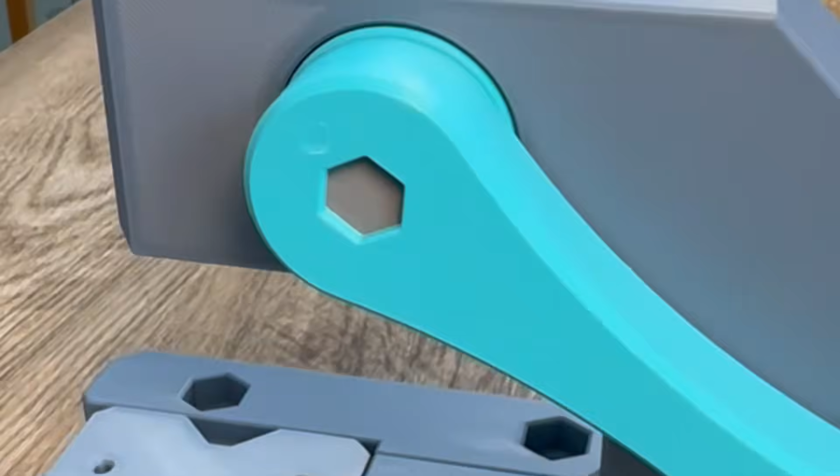We're back with another 3D printed press. This is an upgrade of our previous press based on some feedback we got from people. In this video, we're going to go through the design of it, how to set up your build plate, and then how to put it together. Let's look at the design of this thing.

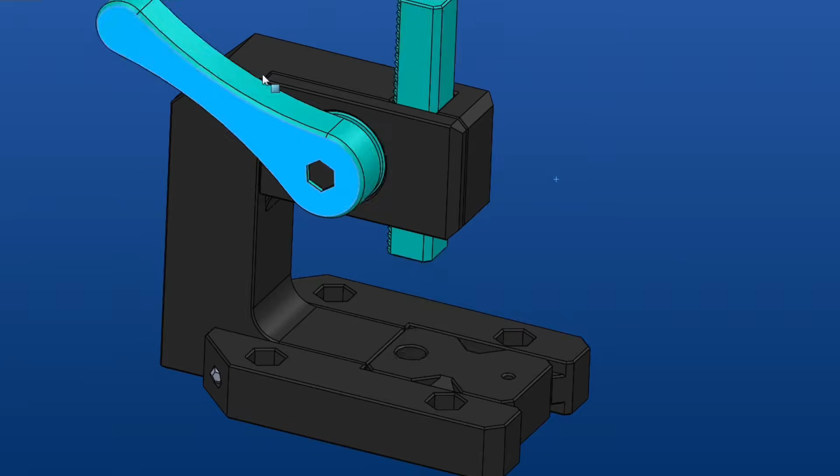We've got a base with an arm. So you rotate the arm, the ram goes up and down, and we're using this to push things in or out of holes most of the time. Inside of here, there's a gear, and the back of this ram is a rack gear. So as we turn, this is how we generate motion. So this guy is basically the wrench to give you a bunch of mechanical advantage so that you could push really hard. The older version was lacking this kind of outrigger, so it was a bit tippy.

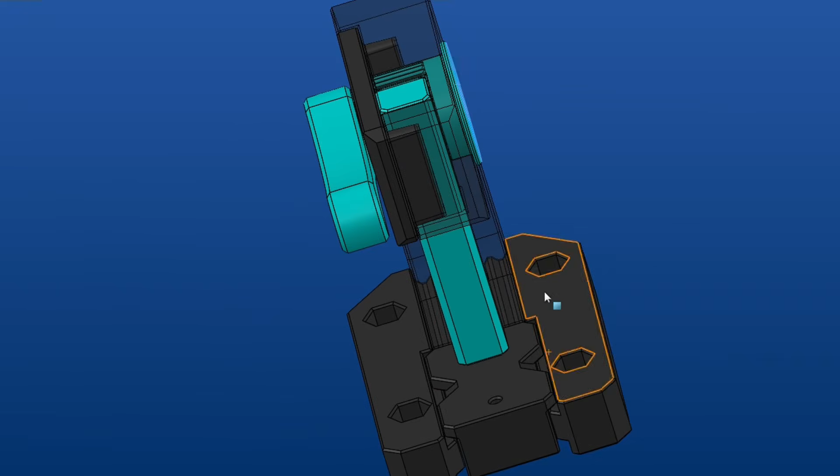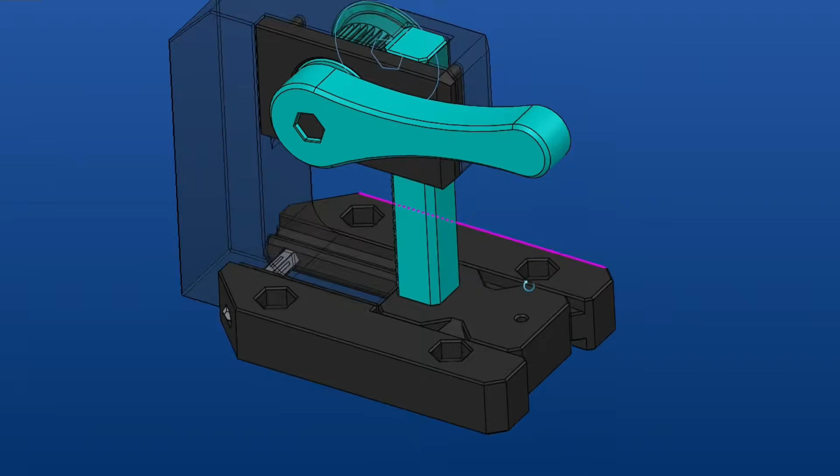We did a better job about it tipping to the left, but the arm had to be on the left side of the thing, well, facing it. And we've extended this out front more because it was prone to tipping in that direction. And now with the longer legs on it, if you're pushing directly over the end, hopefully it won't want to tip over on you. We've also added these counterbores and through holes in case anybody wants to bolt it to a bench. That was a request on the last version.

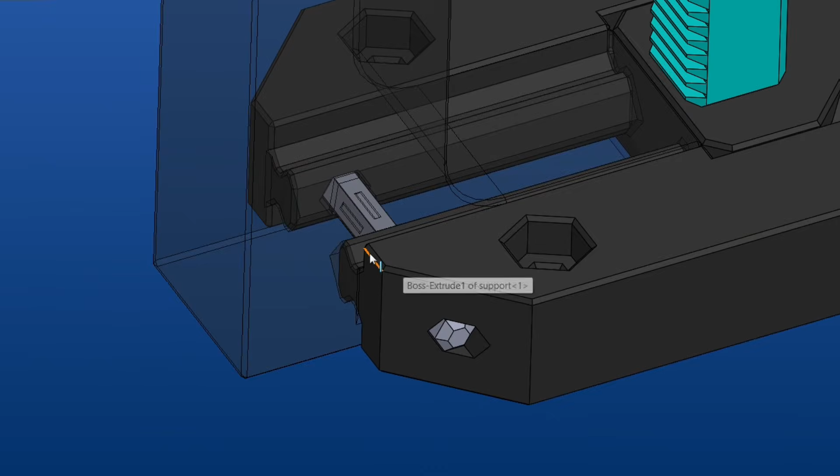So we've added these here, and then the two sides actually attach to the main body via these slide features. They're not quite a dovetail, but they're similar. So they slide right in the front, and then they fit fairly snug. I'm not really sure this crosspin is required, but it's there anyway just to make sure that they stay where you put them. There's a few interference ribs on the inside of this main body to hold the pin in place, and it should be pretty close to flush on both sides.

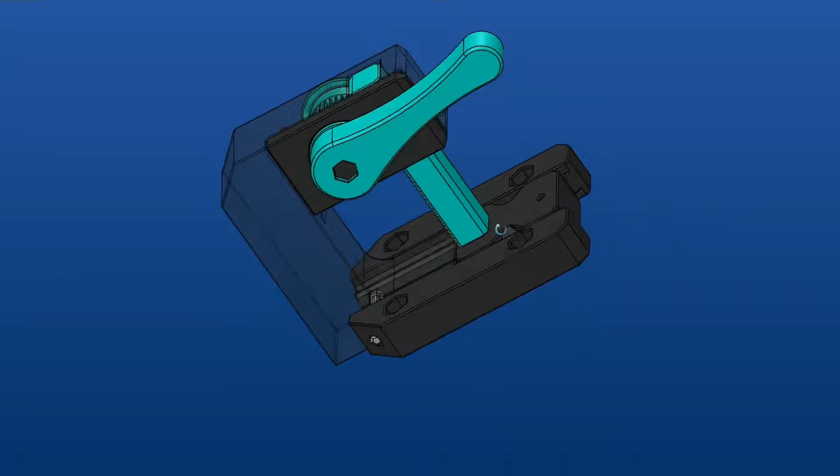It's a little tough to push through, but it's meant to be permanent installation. I don't anticipate anybody taking this apart a lot. So really this was a one-time install to kind of make everything permanent. We had a hole in the last version so that you could push pins out, but you couldn't really get the pin out of the hole after that. So we did have some requests to provide a way to get the parts out.

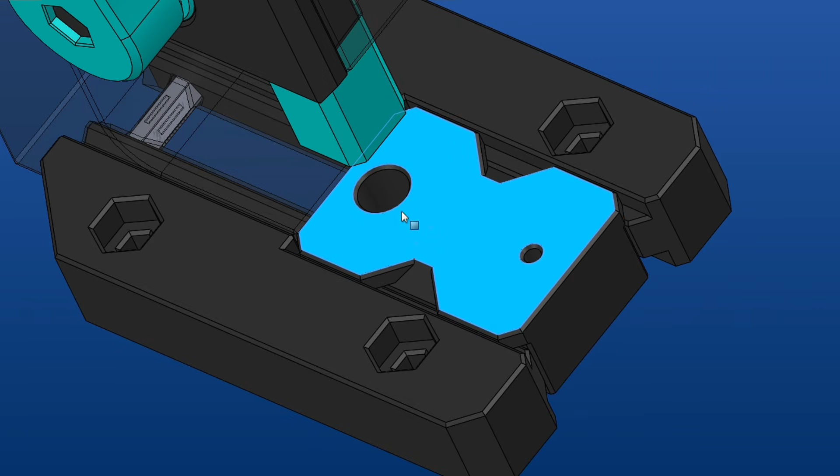So this block is removable. It just slides in. It's staying there under its own weight, and that's it. So when you push things through, you can pull it out of the way. You can also back it up and leave a separation here so that you could fit an even larger thing through. And you've got the two different size holes depending on your application.

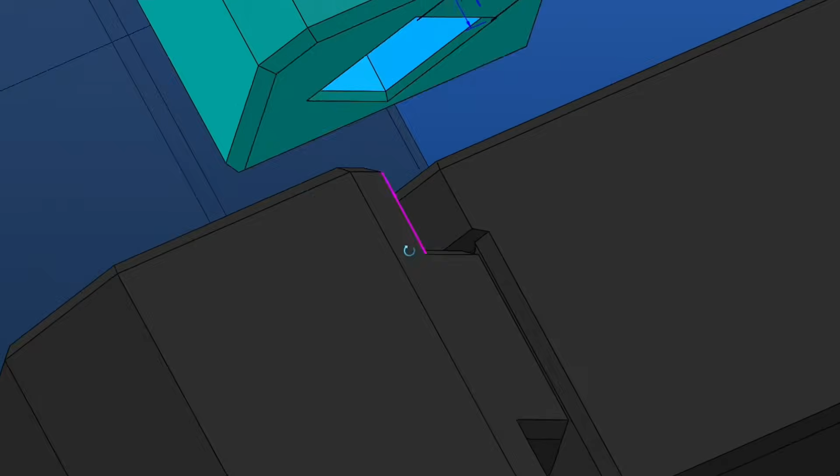The RAM's got a tapered socket in one end. It's 2.5 degrees on the side. It's 15 millimeters deep, and it's 10 millimeters square on the front face. The chamfers are added after that. So somebody did request that we add this feature for adding accessories to the end of the RAM. And we also still have the other end, which is solid. So you can just flip it over if you have no use for the accessory. And maybe I'll add the RAM with no accessory socket too, in case someone wants two empty ends.

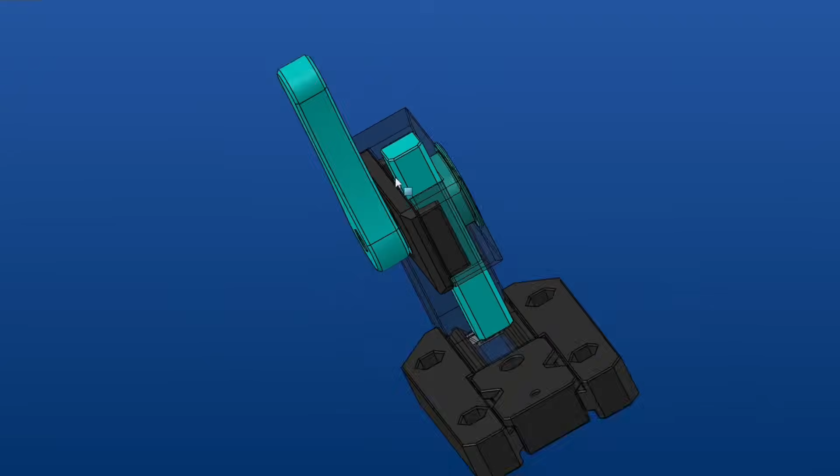This plate, really, its only purpose is to form this side of the cutout for the RAM. We couldn't print that with no support, so we've got this guy with interference ribs. It pushes down nice and snug, stays in there, and nothing's really pushing against it. The forces don't really provide any side load most of the time. So this stays in place, really does its job nicely.

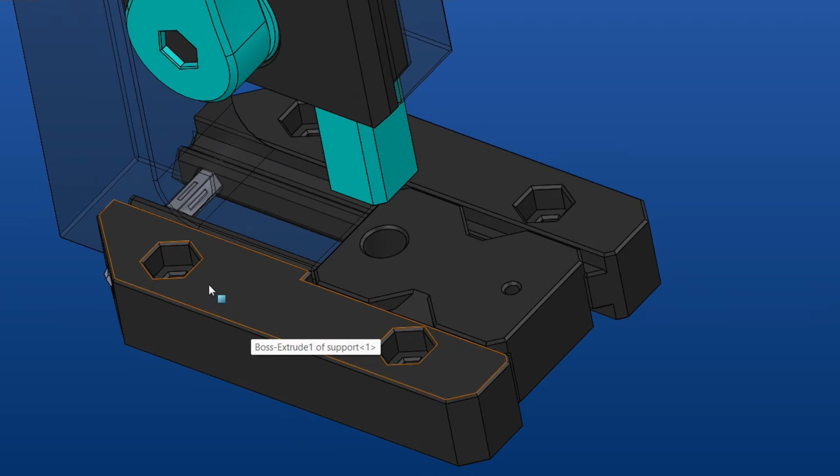This piece is reversible. It's the same part on both sides, so the counterbore also exists on the bottom, which shouldn't cause any problems for anybody. These cutouts were just finger picks so that you've got something to grab onto. I seem to use the big hole now that it actually exists, but those really seemed cool when I was drawing this.

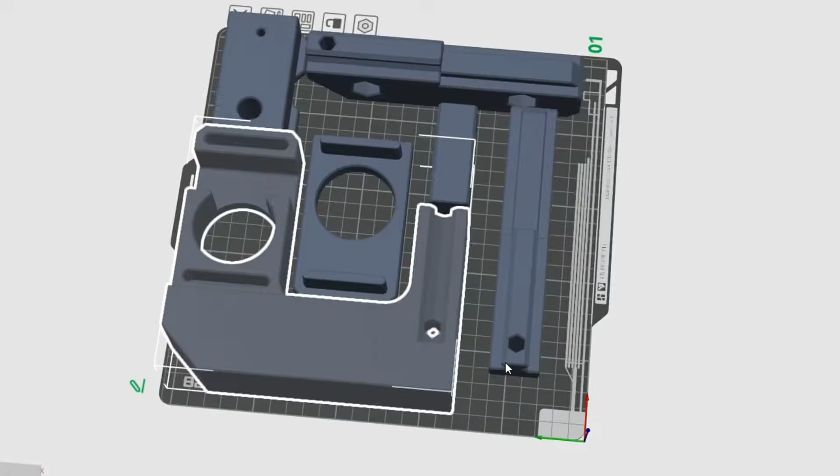This is the print bed setup. We want our parts in these orientations. So the main base is going to be on its left side. We want the sockets facing up, the hole facing up. These dovetail features will print on their side, so that'll give us a nice part with no supports. The cover plate, the side plate, is posts up.

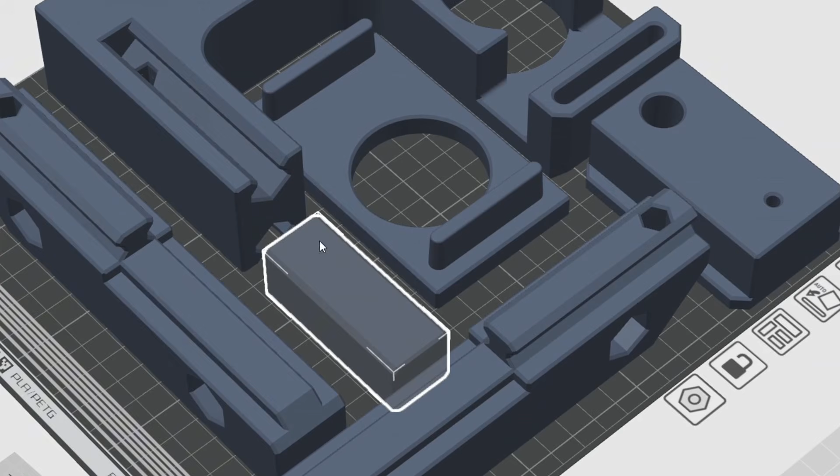We want this square post on its side for strength. Probably print it on its end without too much problem, but it would be a weaker part. We'll maximize strength by making sure that the print lines go in this direction. The supports, we want to print on their side so that the rib is up, and that'll allow us to print all of these hexagonal shapes without support, and we can print this whole rib feature without support too.

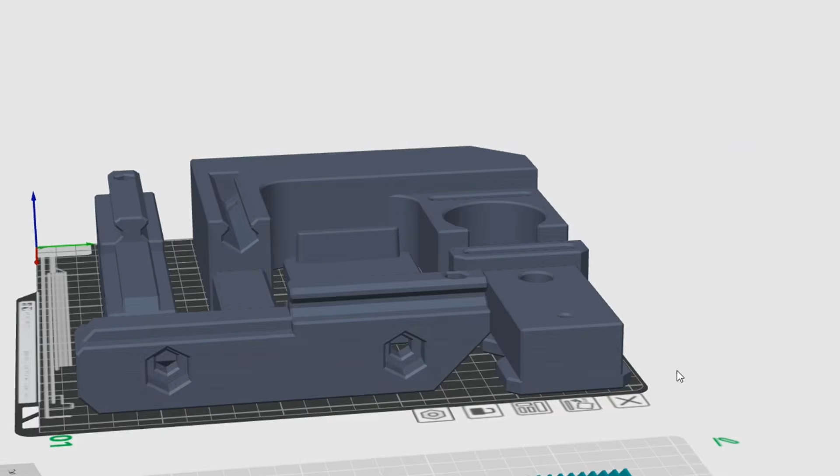Then we've got the center block with the knockout holes. We want to put it upside down so that its top surface is on the plate. We want the wings down, and printing in this orientation just means no overhangs, no support. So the other pieces, we've got the arm with the square socket facing up. The gear wants to put the flange down and the square socket facing up. And you can see there's a 45 in here on both sides that lets us print that with no support.

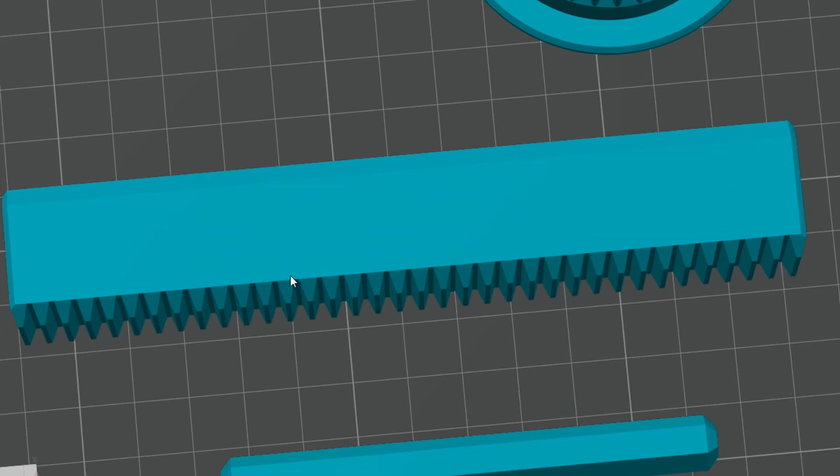The RAM, we want on its side like this. Teeth up would also work, but they would be weaker. This will get a tooth-shaped path, which is harder to break than layers stuck together this way. We got the hexagonal pin that holds the supports on, printed on its side, again for strength. This would be a really tall, skinny part to try to print on its end, and it probably wouldn't end well. Anyways, that's how we set everything up. Print them like this, you should be good to go.

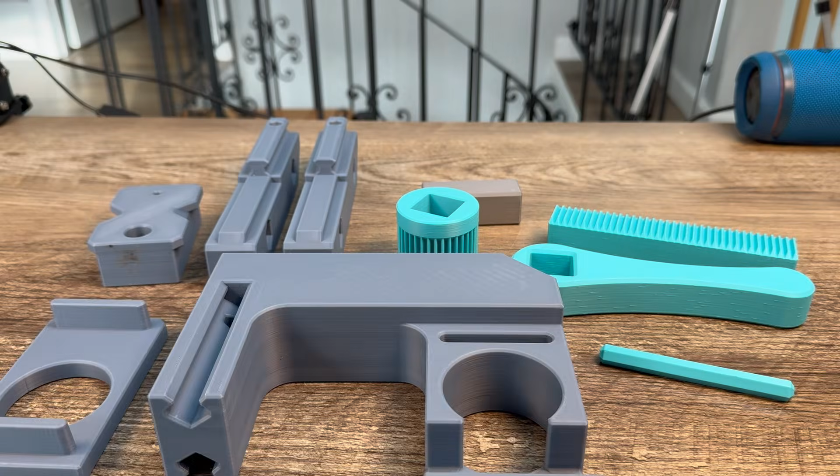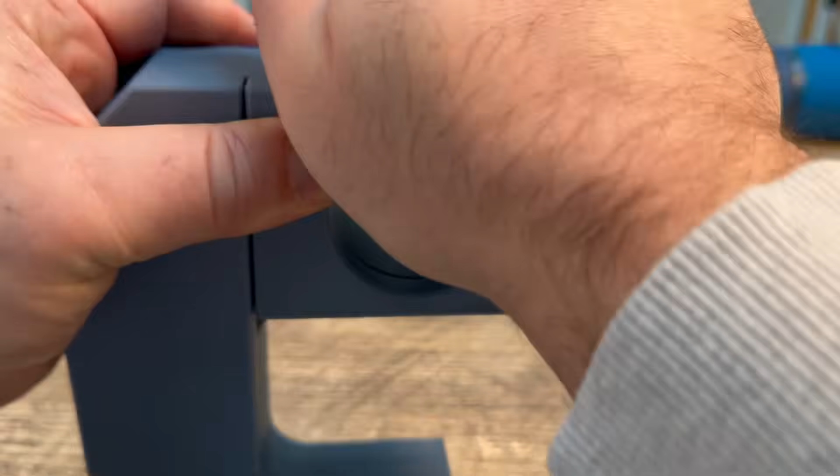Here are the parts we should have printed. We're gonna start with this side cover to finish the channel for the ram. Looking for this big chamfer that wants to be up front, and just align the pegs in the holes and smush this down. Should be a good tight fit with a satisfying feel going in.

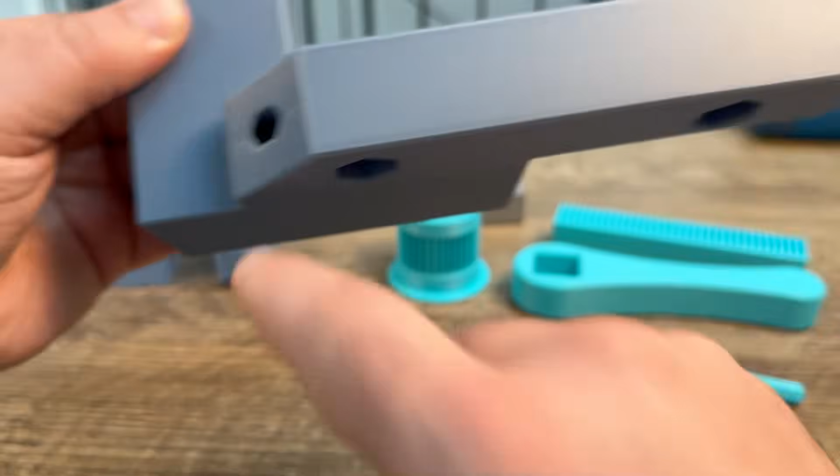Next, we're gonna put these supports on. So this is kind of a dovetail. We've got the male slide on here, and we're just gonna line them up, push them all the way down to the bottom. We're gonna go till they stop here. A good check is to make sure we could see through that hexagonal hole. Once you're there, you're all the way down to the bottom. So same thing on the other side. Push this down, look through the hole again.

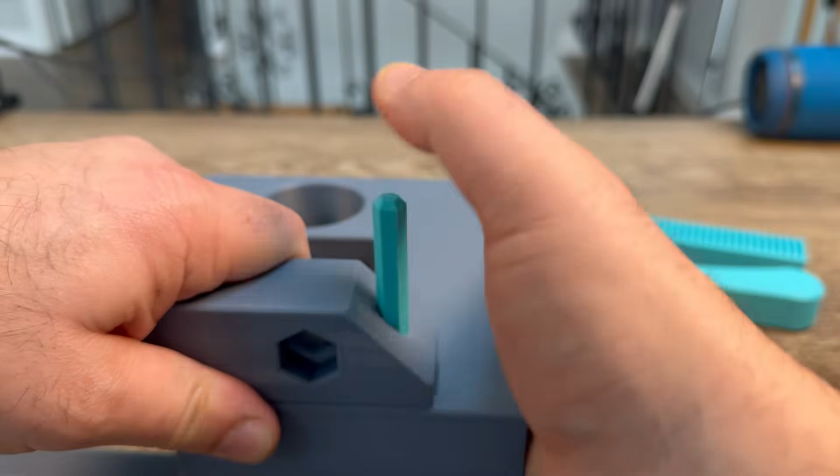Last things last is this pin. Just gonna line it up and drive it through. You might need a punch or something to get it all the way down so that it's not proud, but you can just kind of push it down on a desk and at least get it to here. But that's about where it goes.

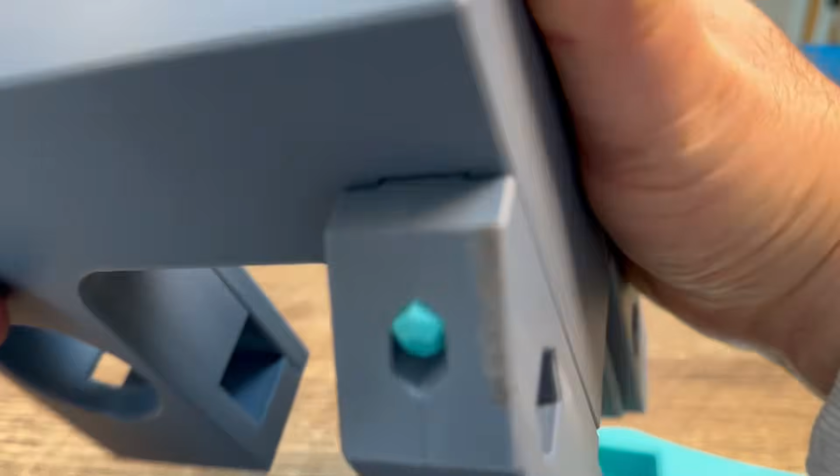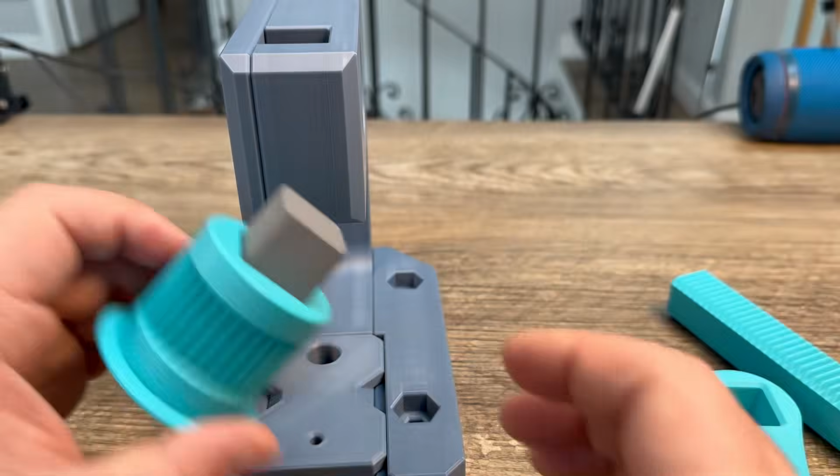So next, we've got this guy that serves as a floor. So it's got these wings that engage with these slots. We're just gonna slide it in from the front, and this gives you a hole that you can push pins through with. We'll take our gear, put the shaft in, drive it all the way down till it stops. Then we've got to choose which side we want the arm on. I want it on my right as I face it. So put the gear in from the left side, and then we're going to choose whether we want this socket down or the flat end, and then drop the RAM in from the top.

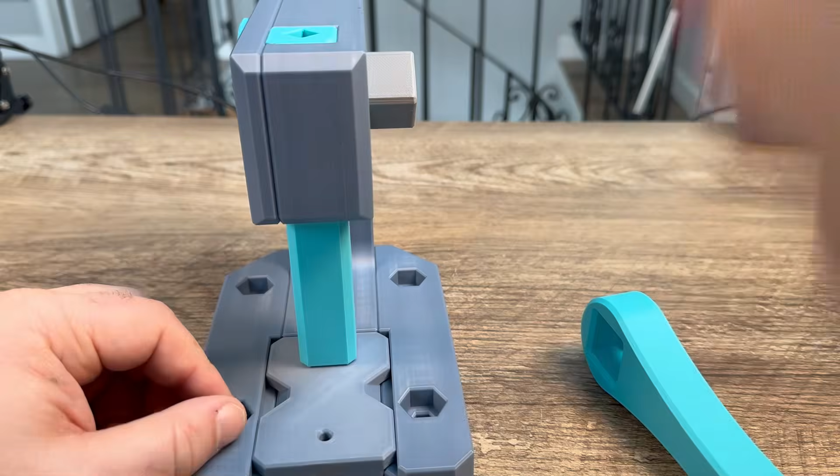We're going to line this up, and that arm angle is not quite right. So I'm going to pull this back up out of the top, and then I wanted this a little bit higher, so I'm going to rotate this back maybe 30 degrees, and now drop this guy down. Now my arm's more at the angle that I want when I finish. So that's how you adjust it to get the teeth in these two to line up appropriately.

Now as we move the arm, we've got a RAM that moves up and down. We've got a hole underneath the center of the RAM so that you could push things through. This block's removable in case you have a smaller pin and a really tiny part. You've got a different size hole. You can also back this up to push something through into a larger slot, but you do have to push against this because that makes right here on the press push against here on the press. If you push against the table, you're just gonna go backwards. So that's it. That's the full assembly. So you've got a few choices to make, and set it up the way that you want.